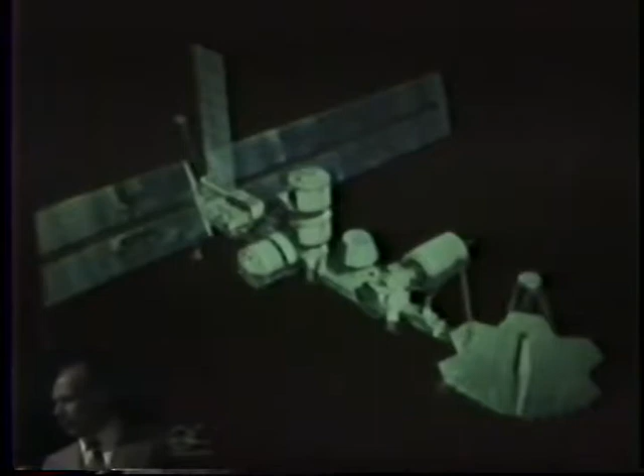So I won't have a lot of the fancy colorful slides that you have, but I hope we'll get this message across. Next view graph, please - this is an example of what we're talking about when we say space station in the early 1990s. This particular concept was developed under a study I ran for NASA a year ago, and represents not an early version but a more advanced version of the space station, which probably begins in the upper left half of that configuration. Later on, the third or fourth year, we would add major outside construction capabilities that you see in the lower right of the scene here.

The lower right at that location is showing the construction of a 20-meter telescope, which, of course, in low Earth orbit we have a much more fantastic, less occluded view of the stars and heavens than we do on Earth. That's the reason we want to take large telescopes into Earth orbit, but they can't be taken up in one piece. There you see a 72 mirror-face unit that is all assembled and hopefully designed and engineered to operate as one piece of glass, with little actuators under each one of those 72 one-meter mirrors.

A heck of a job to assemble, a rough job to calibrate, but that's the intent of NASA, to fly something like that in the late 1990s.

So with this, a goal of a station around the 1995 time period, let's take a look at really where we are and why we're there. Next slide, please.

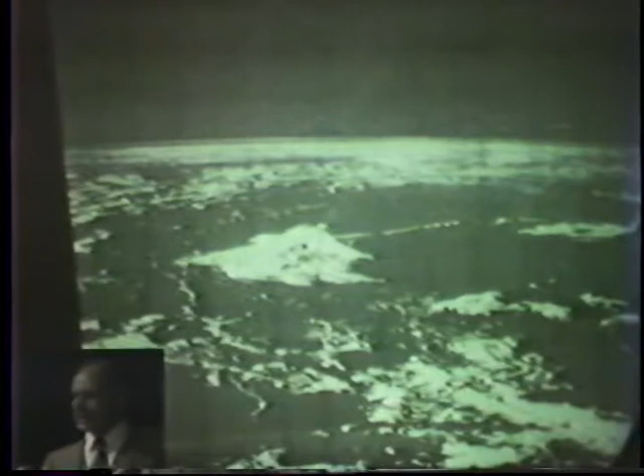Here you see a view from orbit of the Hawaiian Islands. It started off as a colored picture in a beautiful book. I'm sorry I don't have it represented by anything but black and white, but black and white sometimes gives you drama. There are those of us that enjoy black and white photography even more than color.

But that wasn't the reason. I'm sorry for this being such a poor quality image. This is a view you don't see too often from Hawaii. You usually see it on a map and stare at the islands and dream about your vacation. But it gives an indication of a broad expanse of ocean, which, whether you like to believe it or not, we really know very little about.

Oceanographic studies from orbit have been probably the least funded. An oceanographic satellite lasted about 90 days here about 4 or 5 years ago and unfortunately died in orbit. The oceanographers are looking forward to a tremendous increase in study in various frequency bands and various telescopic looks of the ocean, measurement of the currents and the temperatures and the thermals and the gradients and what have you.

The military is also very interested in it for a lot of obvious reasons, because a lot of the wars of the future and a lot of the threats and the defense will be from ocean surface vehicles and unfortunately under the ocean as well.

So this is the kind of view that we're looking to get, not just for a nice view to be seen out of a port or a window, but the same view to be covered by many instruments for science, for the military. We can't say that the military is behind the space station right now, but they have many reasons for those choices. With all of the activities the military has in space, a lot of us feel they eventually will certainly do technology testing on the space station, but that's a private opinion.

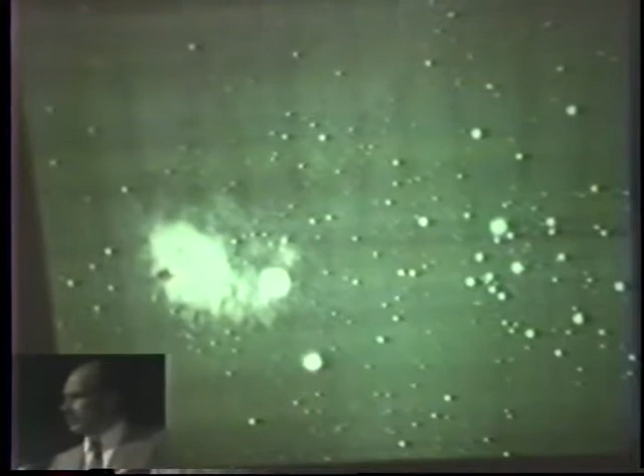Next slide, please. That same access goes looking the other way, not just down at the Hawaiians and the islands and the Earth, but toward the stars themselves.

Astronomy has the greatest political clout of any science in this country. More money is spent on astronomical science, more appreciation on the part of the public, and more money spent on university research at various astronomical institutions.

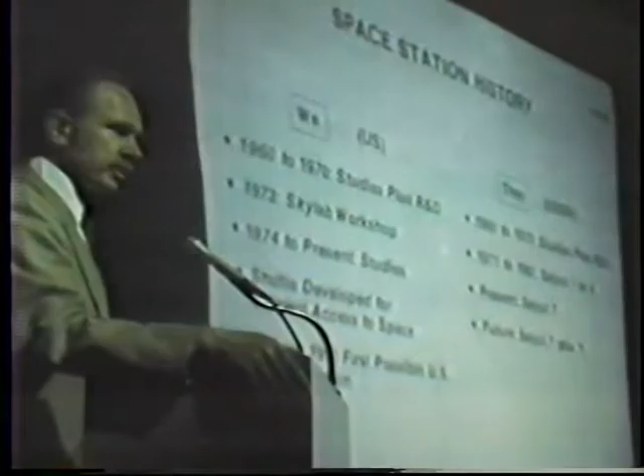What is the history of the space station? Early in the 1960s and through the 1970 period, there were a variety of studies on the part of NASA, and a little on the part of the military, to look at 4 to 6 man space stations. Our company happened to win the first space station mock-up contract, from the London Daily Mail newspaper. In the late 50s, they put out an RFP, and I think it was Boeing and ourselves who competed for that. We won a contract to build an elaborate mock-up, which was on display in the London offices of this newspaper, to show what was in prospect for man in the future. Since that time, our company has had an involvement with every major NASA space station study contract.

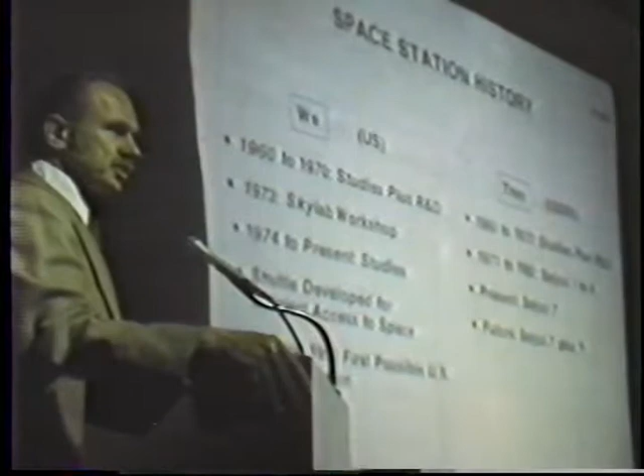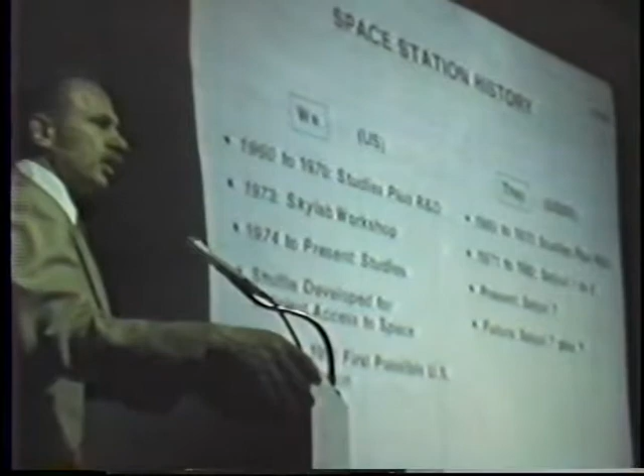We built Skylab, we built the Air Force MOL contract before it was cancelled. We advised the Spacelab consortium in Europe during the 70s, and Spacelab flew recently. So we've had a long and dedicated involvement in having man in space for long periods of time.

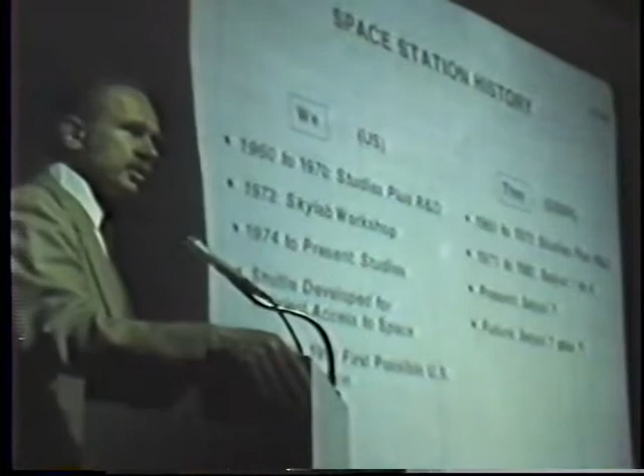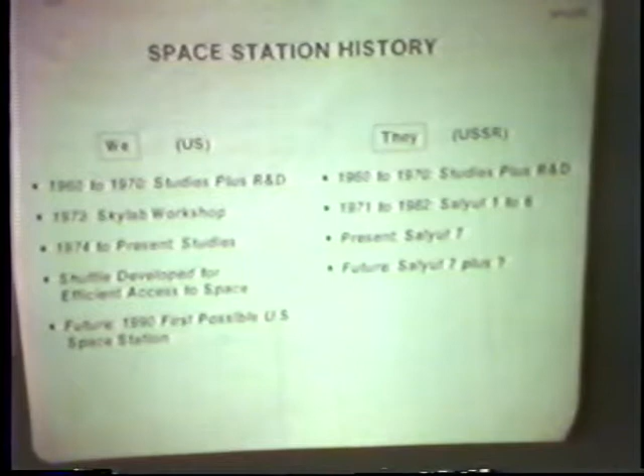Now the interloper in that was the access means. When NASA saw this tremendous potential in space, they concluded they could not get there with the Apollo configuration, which of course was this giant Saturn vehicle, all the parts of which fell in the ocean each launch. They had to have a reusable capability, so they developed the shuttle vehicle first. One of the main reasons for the shuttle was to act as a 90-day, 3-month shuttle vehicle to a space station, which hopefully would succeed it, and which is now the general plan.

In '73, Skylab flew, had 3 visits and up to 84-day residence, and eventually, as most of you know, came down because the sustenance was not incorporated, because we felt the shuttle vehicle was coming, which would open up a new era of modular space stations as opposed to one giant large vehicle.

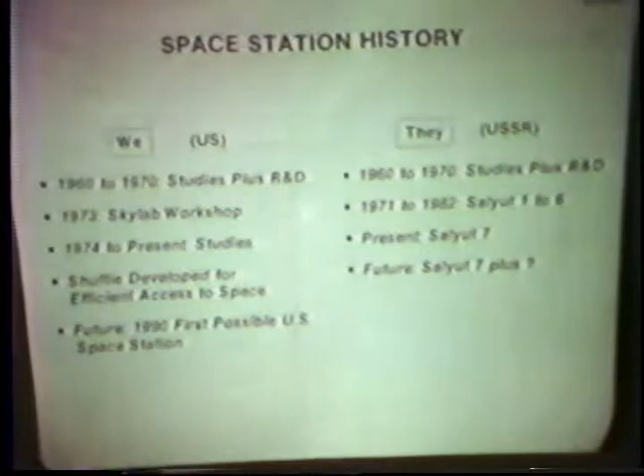Since that time, a flock of studies were accomplished, and here and there the space station was on the brink of development, but never materialized until in January the President cited it as the number 2 objective. I believe he had something like 5 or 6 objectives for this company and country in the State of the Union message. Now it remains only to be seen how much money will be put into it this year, next year, aimed at 1990. It's actually slipping a little bit now since this chart was made—1991 launch. Understand now 1991 is a good possibility we'll have a space station.

The Russians have been up there since '71, and they've recently been escalating their vehicle to grander dimensions, already have weapons on the vehicle for a number of years, and are doing very sophisticated and openly, avowedly military applications, and we are still studying the problem. So we're looking forward to that being a forcing function from a technological and image pride standpoint. But again, those thoughts are great, but when you're vying for funding within the Washington scene, a lot of other emotional issues come into the budget picture.

I won't repeat what the Russians have been doing—I think the chart stands for itself.

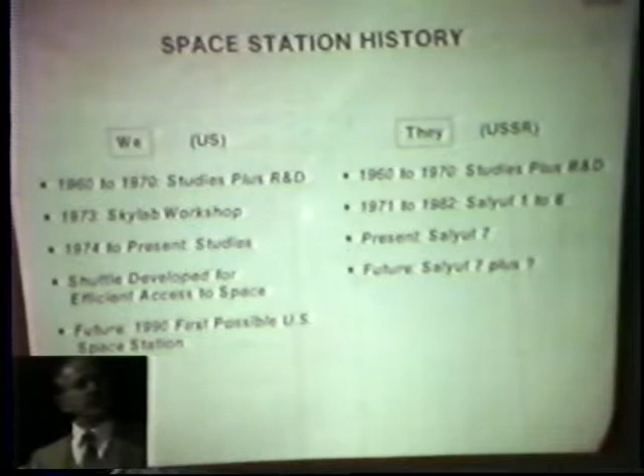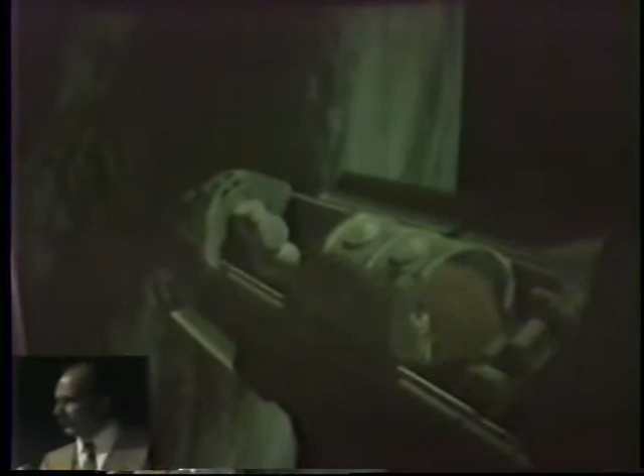Spacelab flew recently, very successfully, a great credit to an 11-member consortium of European countries involving everyone from Spain to Austria to Germany. Germany had the largest portion, I think the Italians were next, something like 50, 20%, then the French, British, and whatever. They all got together in what was imagined to be probably a Tower of Babel kind of operation that would fall apart because of lack of communication, but they did a great job. We helped them in certain areas as advisors and consultants. We won that contract separately as a company, but they built it and they literally did it all and deserve the credit. The European consortium put up about 1 billion accounting units, roughly equivalent to dollars.

The Europeans hoped that this country would buy more than the one module, which is now available for flight. They hoped there would probably be 3 or 4. That has not happened because the shuttle took considerable money, and a lot of money had to be put into payloads and what have you.

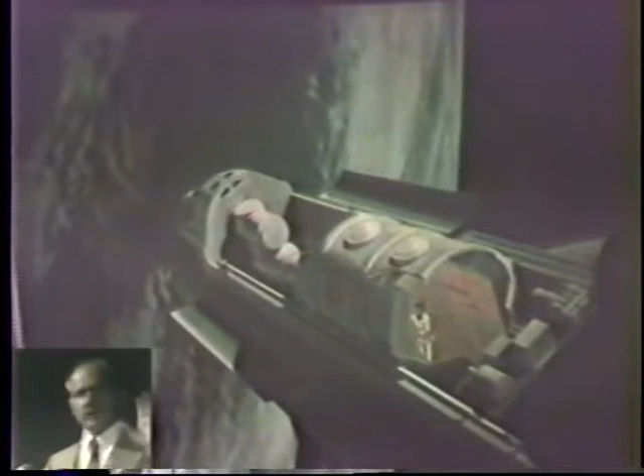But the Europeans are still interested in participation in the space station, and NASA is now grappling with how they might be involved. Conceivably, they could take a Spacelab, outfit it for longer flight than the 7 to 10 day shuttle flight, and plug it into a space station. Germans are already planning to fill a module with their own experiments alone for space station utilization, to show the enthusiasm that exists in the rest of the world.

To talk about competition, most of you probably know the Europeans have a consortium vehicle called Ariane, a serious competitor launch-vehicle-wise to our American shuttle and our company's Delta launch vehicle. So if you don't believe that competition enters into what goes on in space, look to the commercial world, which finds American companies flying commercial communication satellites on European vehicles. And the Japanese are not far behind—they have an N vehicle with major capability and prospect for geosynchronous operation, where most commercial communication satellites are. So we might be looking to the east and to the west for competitors now, in the launch vehicle business, let alone commercial services or scientific and technological experiments.

This then is Spacelab—just begun, a long and fruitful series with prospects ahead, but it only flies as long as the shuttle does. Therefore, we have this yearning to go many more weeks and months longer than that. Thus, we find the concept for a space station developing in our minds.

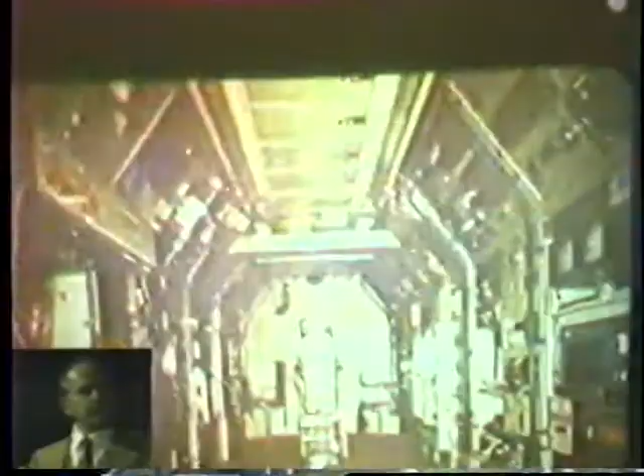This is the interior of Spacelab, probably a good image of what the interior of a space station module will look like. Remember the 15-foot diameter constraint of the cargo bay? Once you make that cylinder and want human passage and operation in between, you'll find your equipment on the outside, most likely, with a passageway and maybe even some experiments in the middle of the floor, as shown here. This probably will be found replicated in a space station scene maybe 5, 6, 7 years from now. So it's a good image—the Europeans could even fly something like this and plug it into the space station as a plug-in module.

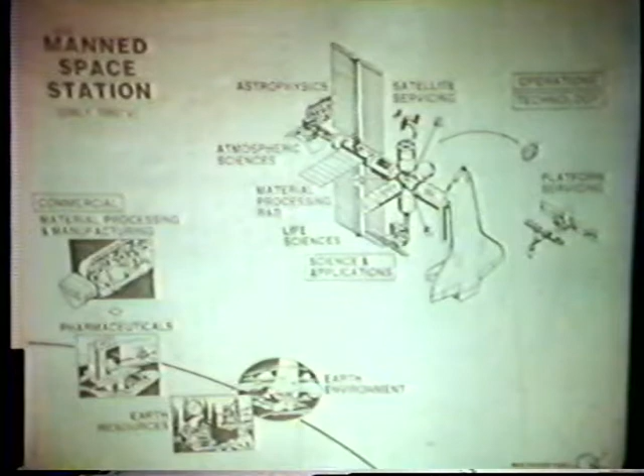So we see, in overview, that in the early 1990s we're looking forward to not just science or technology operations in a space station, but specific commercial utilization. Our company has a joint venture with Johnson & Johnson in the pharmaceutical world for continuous flow electrophoresis separation of cells for pharmaceuticals—very high demand, very expensive, very high cost to low weight items, ideal for a situation in a space station.

Space station provides a zero gravity environment which would apply to various exotic materials and what have you, but pharmaceuticals and lightweight items with high cost are the things that really pay off in a space station. I think you'll find that pharmaceutical production is in prospect for a space station.

We've already separated live cells and some simulated cultures in earlier shuttle launches that you may have read about in the paper. So that prospect is there.

Obviously, looking down at the Earth, its resources, and the Earth environment from that view is a great application of the space station, not the least of which is the ocean one that I mentioned, which feels like sort of a forgotten science from a space standpoint.

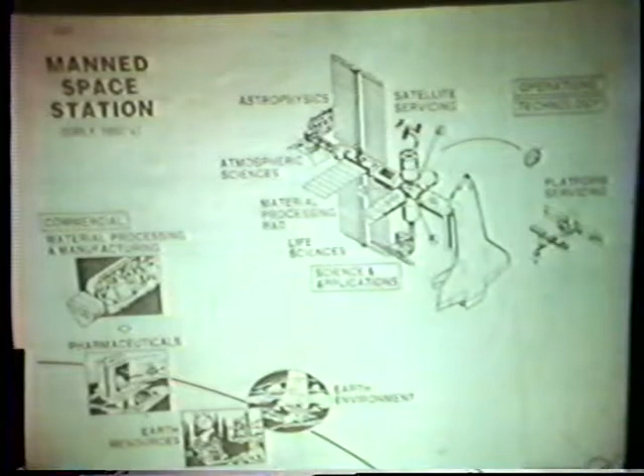Let's escalate in time to the late 1990s. Here we find several significant additions. The vehicle takes on a literal space base operational mode where we can launch vehicles to geosynchronous orbit, 20,000 miles in space, understanding the space station is down at several hundred miles altitude. Instead of launching everything up on the shuttle and out of the shuttle, we will use launch vehicles that are based on the space station.

We will only bring propellants up from the ground now, and we'll be able to use that as a launch base to deliver and service things that are in geosynchronous orbit. Also in that time period, we'll probably incorporate the flight of a unit called the platform, over there on the far right of the screen.

The platform is for those payloads that can't stand the shake and the rattle or the effluence of a manned vehicle. That could be certain instruments, infrared instruments, certain visible region instruments that want very quiet conditions. They work at 1 arc-second pointing accuracy, and obviously they can't stand the impact of a man floating across who bumps into a wall, or someone who coughs, or equipment that moves and shakes the vehicle.

So they will want to be off on a co-orbiter vehicle, and that is called a space platform, specifically for those reasons of service and separate operations, yet serviced from the space station by little scooters that go over and replace propellants or exchange experiments and that type of thing. Again, a close-in operation using the space station as a base of orbital operations, as opposed to bringing everything up from the ground with the shuttle.

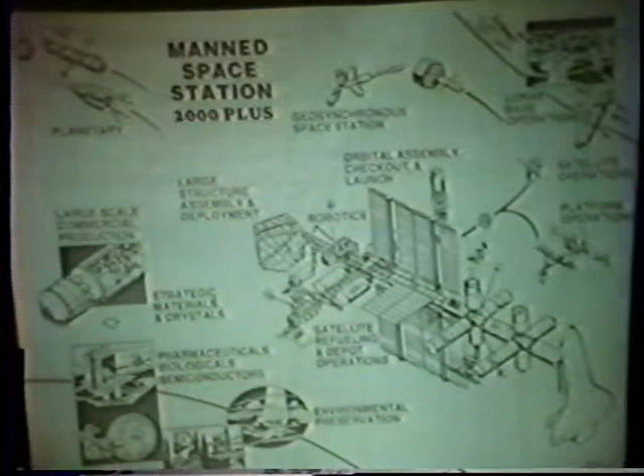A satellite that goes around the Earth, and the Earth has so many complex operations that require a military advantage of some off-site base or surveillance advantage, is just too lucrative a spot from a military standpoint alone to stay unused for very much longer. And the space station would be an advantage there.

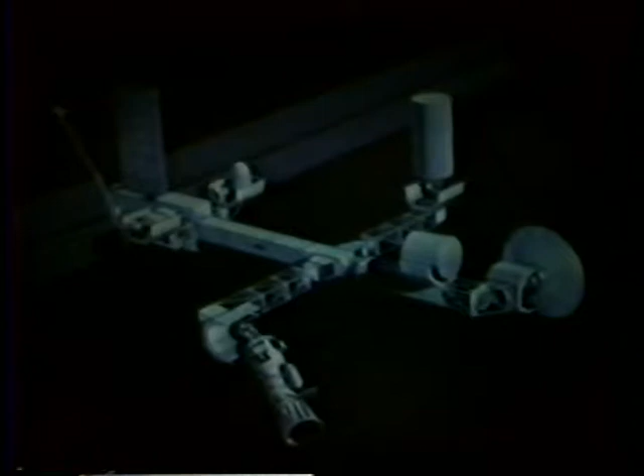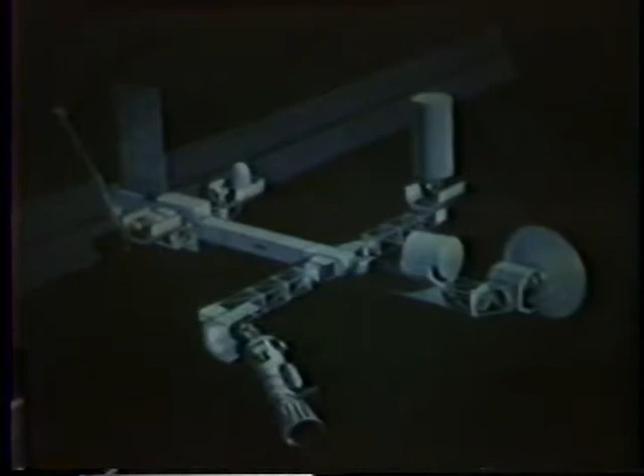This is a picture of the space platform, the vehicle that flies unmanned but is shepherded by the space station, flying maybe 20 to 30 miles away from the space station. Flight mechanics and physics principles being what they are, whenever you're in a different orbit, you begin to fall behind, move ahead, or fall below your companion vehicle. But it's a repeated process because you're basically playing with the basic laws of nature.

So there's a scheme whereby we would have this vehicle slowly change its position around the vehicle in an ellipse. When we complete half the ellipse, we would use propulsion to elevate it to its original position, and then we would track around in that semi-ellipse flight mode again, probably taking several days to go through that excursion before being escalated up to its original position.

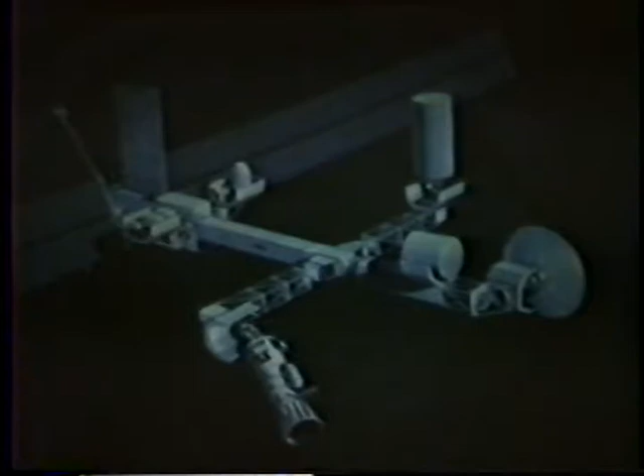So look forward to the space station not being alone, but having an off-site facility for those payloads that do not want to be on the space station, but serviced by it.

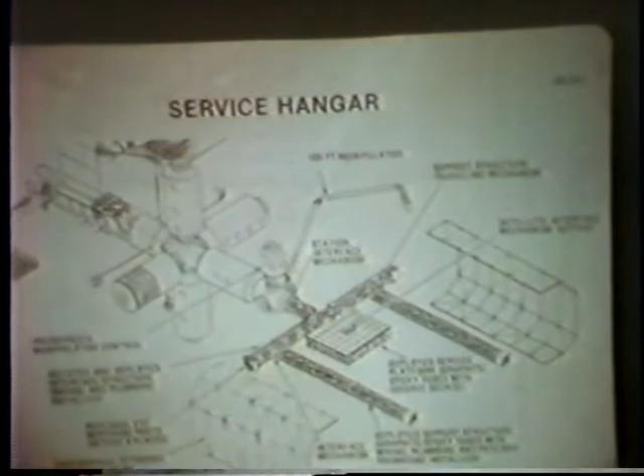I believe we have two on top of that. Are there two separated? No, I'm sorry. Are there two stuck together there? Yeah, I believe so. Thank you. The other one first, please.

Everything that is on the space station comes up by the shuttle. The shuttle will then have to be—and here's where architecture comes in—as you look at an industrial facility or a high-tech facility with frequent services coming into one point, you have to make sure that the entrance corridor, the operating envelope, and the service flow, the traffic flow of operations during that logistics visit, are efficient.

Generally, the visit of a vehicle like this is a major perturbation to the operation. Certain scientists will be brought up new, others will go home, and their equipment will go home. There's equipment that comes from the inside and is brought through tunnels into the shuttle.

There's other equipment that is taken out with that large crane, out of the exterior cargo bay, and loaded onto the space station. Sometimes we have to take off payloads on the space station, put them on a parking spot, take the unit out of the cargo bay, put it in the original position of the other one, and then take that other one and put it into the cargo bay of the shuttle.

So we have this grand game of manipulation that goes on outside, while inside, in what we call an IVA mode—intravehicular activity mode—the astronauts push these little units that are being replaced by others as the scientists, technologists, or commercial people exchange payloads. So you can see the shuttle comes up.

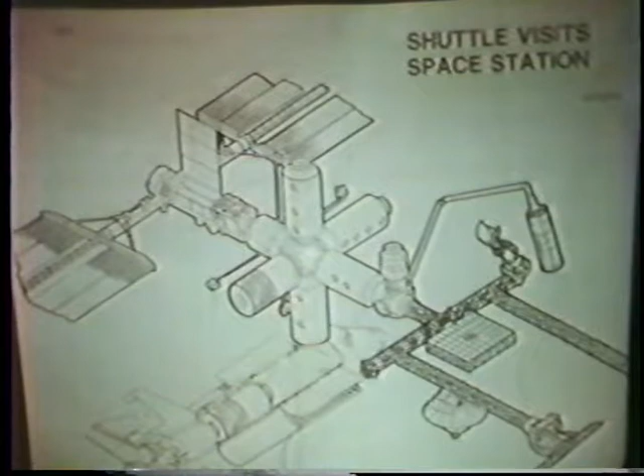Over on the lower right, you see the major outside operations facility. This is where things will be docked, assembled, repaired. We came to a conclusion early in the space station design business on this go-around that the outside operations, like many high-tech test facilities, are a major dominator on the scene. We don't want that facility anywhere but out in, quote, the backyard. We don't want it in the middle of things.

We need a lot of reach room, we have to put utilities way out there, and we have some hazardous units. The one that's on the end of a crane is about 7,000 kilograms of liquid hydrogen in that particular experiment. There are major hazards associated with it, as those of you who've worked on major facilities using cryogens here on Earth understand. In space, we don't always have those large cement block walls we can put around them, so we need unique operations and design features incorporated into that.

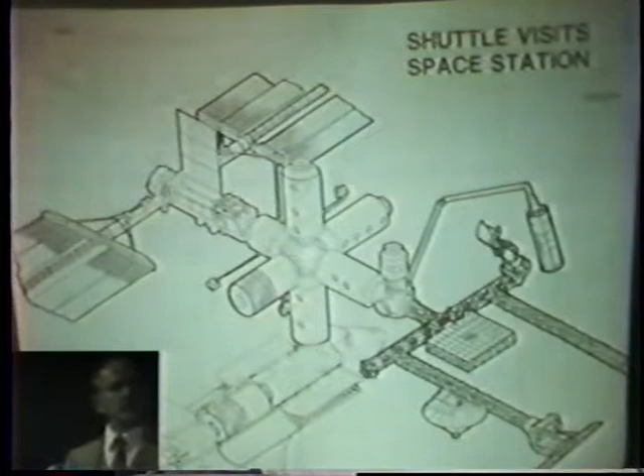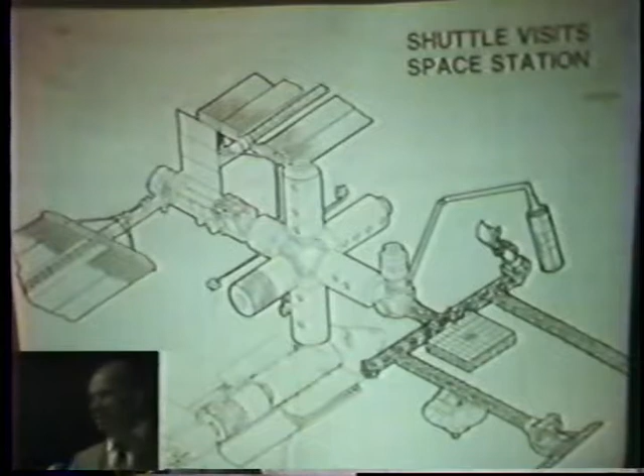We also need a major control center for all of the operations, and you see that mini blockhouse at the base of the crane that literally is a control center for everything that goes on in the aft section of the exterior of the space station. Meanwhile, in the other modules, things go on as usual on an interior basis, literally irrespective of what's going on outside.

Then we escalate our thoughts into major repairs and servicing of vehicles. We get into a hangar concept. We have to enclose some of these vehicles that we bring onto the space station and service. Some of them need major repairs, some need major payloads exchanged on them, and we have to protect them from the sun.

Sometimes we have to actually pressurize the area. So those of you that have been involved in large structures and hangar design understand what a challenge it would be to bring a major structure like this up, all folded up in the shuttle. I might mention I saw the truss work here outside.

A major new thrust in our business is the development of efficient concepts for deployable trusses. I would say that anyone with good ideas in this area would certainly find it interesting to track what is happening in our business and could possibly even contribute to it.

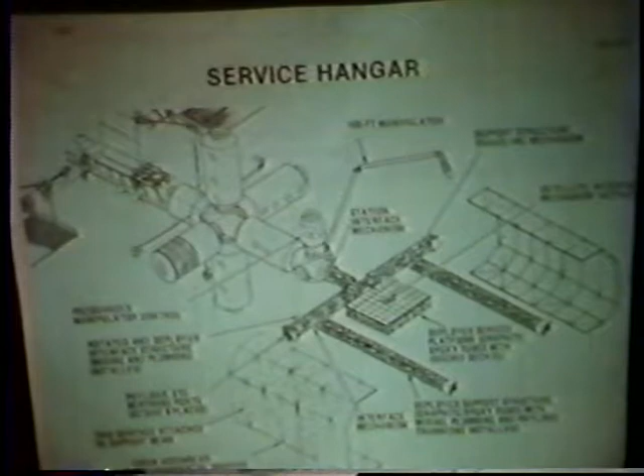When you pack trusses into a high-density pack so that you can have a major deployment and expansive kind of set of structures that you see here, space frames, I believe they call them in your business, that is a whole new technology for us.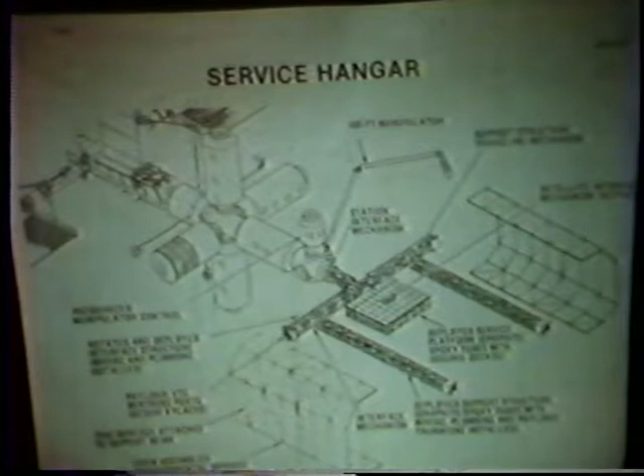The big hooker in it is when you have lots of joints and you're trying to deploy it, you don't have a lot of capability to get out there and unfreeze a joint that may be hung up. And when you have hundreds of joints, you've got to make sure that the deployability is in fact there and that the reliability is there. So everything that glitters isn't gold in easily appearing deployable structures.

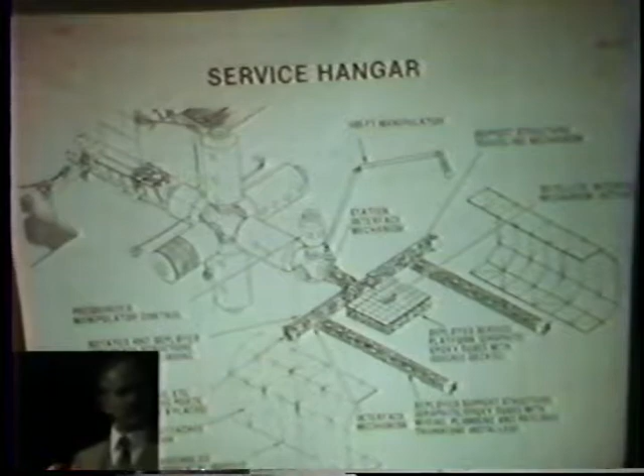I mentioned astronomy before. This is a view of what it might look like during the construction of this 20-meter telescope. The 20-meter telescope will follow the current series of infrared telescopes and the space telescope that Lockheed is building, for example. Lockheed is building a telescope that is the size of the cargo bay of the shuttle, about 3 meters in diameter with its surrounding enclosure.

The next step is this 20-meter set of optics that'll be taken up. Each one of the individual mirrors, which are the hexagon shapes, they're being studied right now by Eastman Kodak and by Perkin-Elmer and the Itek Corporation, the major optical companies in this country. And people like ourselves are studying the substructure.

So there you see a unique blend of people that are optics-oriented, people that are structures-oriented, and our mechanical designers are having a field day designing these various deployable trusses. And our EVA specialists are, of course, trying to integrate the entire operation.

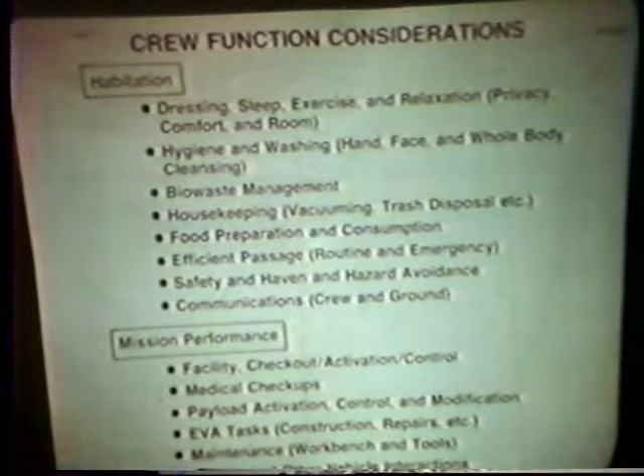And the old ones go down. Next slide.

The habitation for each one of these crew people, of course, understand now, male and female, integrated facilities now, not so on Skylab. The personal hygiene functions, the waste management, 150 pounds for each crewman for 90 days, no small problem.

Trash management, huge problem. On Skylab, we were fortunate, Skylab was built out of an upper stage of Apollo. It had a huge liquid oxygen tank, did not have oxygen in it, but we used it for a trash bin, 22 feet in diameter and about 10 feet deep.

Very convenient. We're not going to have that on a space station, but we're already noticing on Spacelab that we generate a tremendous amount of trash with the food, the cartons, the paper that's involved, the throwaway clothing, reusable clothing, that type of thing.

And getting all the way down to the bottom element, the most personal element, we feel a full compartment concept, not the crowded concepts that you sometimes see for a space station. If they're going to live up there for long periods of time, the crew compartments should be fairly elaborate so that we don't end up with psychological problems on the part of these high-tech personnel that we have involved.

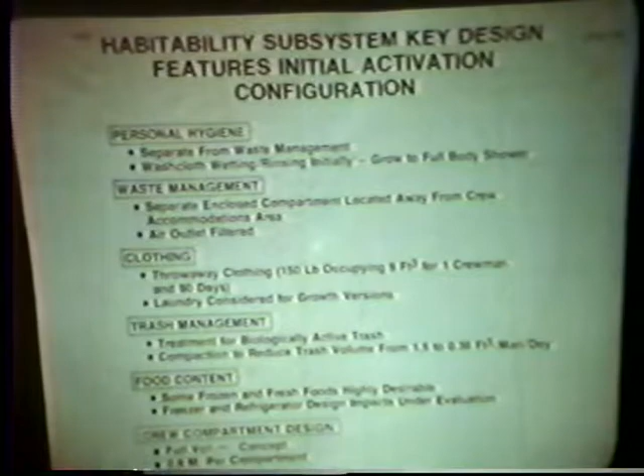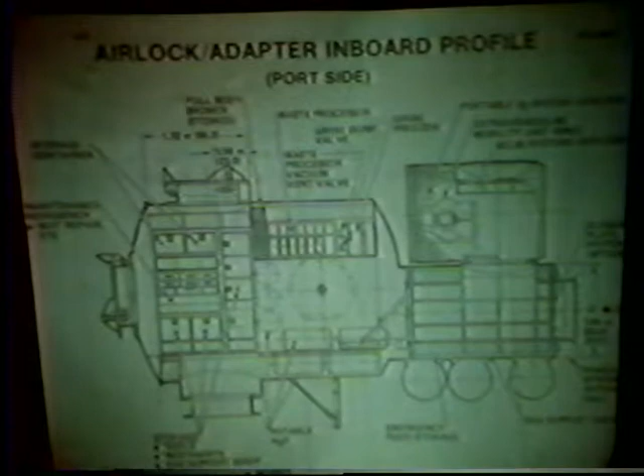Here you have a central docking adapter unit where we have essentially a bathroom. We have various ports on which to mount modules on the upper, lower, and straight out the back, and also into the screen attached to the front.

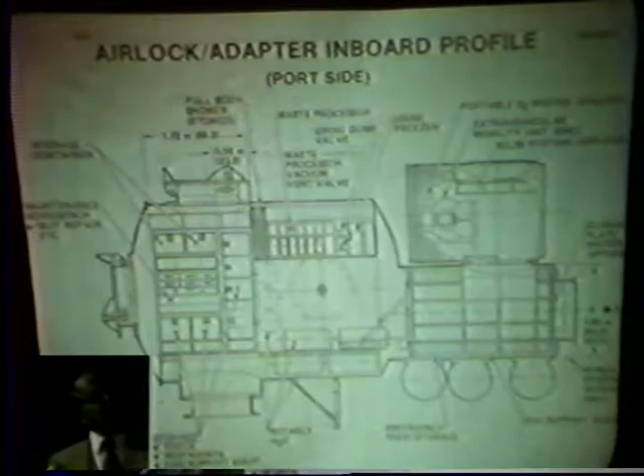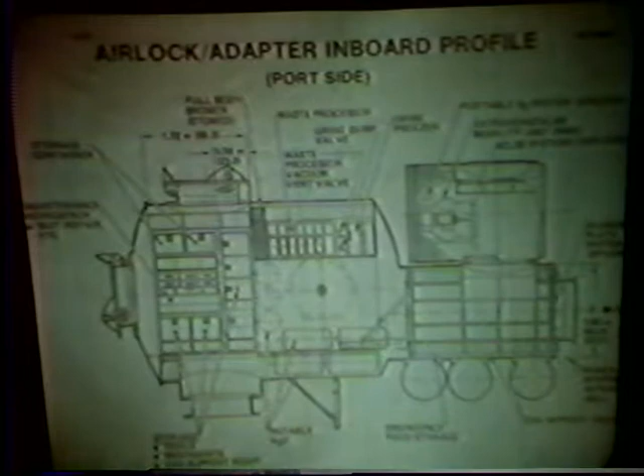Here is also where we have our escape hatch, our EVA airlock over there on your right. That's an airlock that permits EVA crewmen, there have to be two at all times, one monitoring and one performing EVA functions outside the vehicle. Inside the vehicle you have a workbench and maintenance bench and suit repair facility.

This unit is heavily shielded and would constitute a safe haven in case of trouble on the vehicle. That's a central facility that most every space station has got to have.

Underneath the floor, we'll probably have our trash compactors and various pumps, pipes, and filters for the environmental control system, and that will also be true on the space station of almost anyone's design. Next slide.

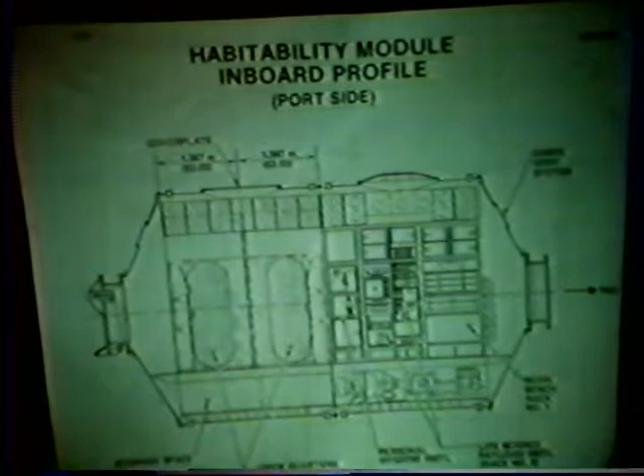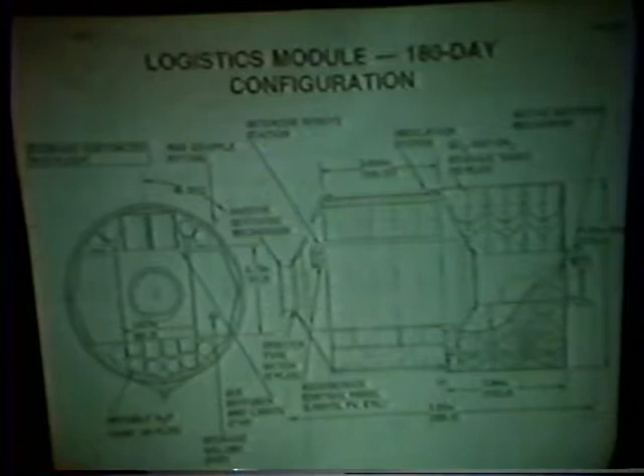Now we come to Brand X. The boys across the water in the USSR have been flying one half of this vehicle since 1971, and last year increased the size of the vehicle, almost doubling it, and added a multiple docking adapter in the center for even larger growth. They have major plans, a giant vehicle roughly the size of our Saturn vehicle, which we no longer have. A model of it is sitting in a launch area and has already been detected by our military intelligence. They plan big things in space.

It's all built on a very simple modular approach, the way the Russians have always done. Very little exotic design, just straightforward, plain utilization of space, not too many design awards. The people sleep in there like the older submariners did, literally over the torpedoes or crowded around the equipment. Not too many human factors awards, but they get the job done. And they've been using the same vehicle for years.

Once they come up with a design, much like they do with launch vehicles, they keep building that same one over and over and utilize it. They put their money into what they do with it, not the carrier vehicle.

The analogy I like to draw is the DC-3, and not just because I work for that company. The DC-3 was used all the way up through Vietnam as a gunship. It was developed in the 30s. It carried guns, these high-intensity Gatling-type guns that were very effective. It didn't matter that the airplane didn't look like a modern design. It's the function, the payload, that was important. They used DC-3s, and up until a couple of decades ago, they used the Ford Trimotor down in the Brazilian jungles. Very effective. They got the job done.

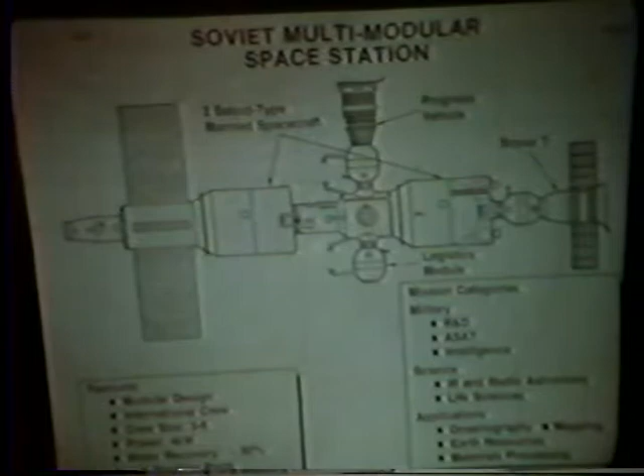So we have a few things to think about as we look at where we are, where we're going, where Brand X has been and where they're going. We are the greatest in manned space flight. The things we've done, going back from the shuttle through Skylab, through Apollo, were spectacular.

The Russians are now starting to build a small shuttle. The Russians never had a Skylab. The Russians never had an Apollo. They do have their own vehicle that's been up since 1971, a relatively small vehicle. They're avowedly military—they make no bones about the fact they do a lot of military work. They also do a lot of good civilian Earth resources kind of work.

Many exciting, rewarding, commercially profitable things are in prospect on the space station, and they need the long-term presence of the most capable machine that we know of—and that's men and women. The human being performs functions that in a lot of cases we have not yet been able to automate, plus the fact that he or she can think on the spot faster than many computers can really develop a capability for.

The Russians have been up there now some 13 years. Hopefully we'll have a space station by the early 1990s.

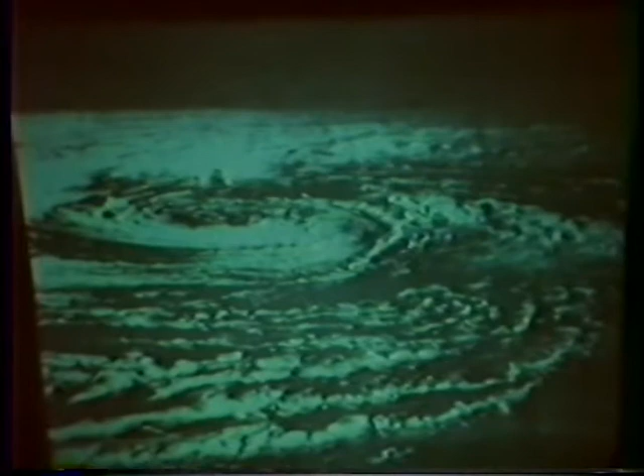Next slide, please. So we find ourselves, in closing, taking the perspective of being in orbit, imagining commercial activities producing pharmaceuticals, producing exotic metals, producing chip materials. We have an electronics explosion—gallium arsenide chips of very high purity, which means very high performance computers can be better made in zero gravity than here on the ground.

So industrial use, major scientific increases in capability, major technological advancements made in orbit that can be used on the ground, major use of a space station as a space base for other things in orbit so the shuttle doesn't have to keep coming down to perform those functions. Those are what are in prospect for the space station.

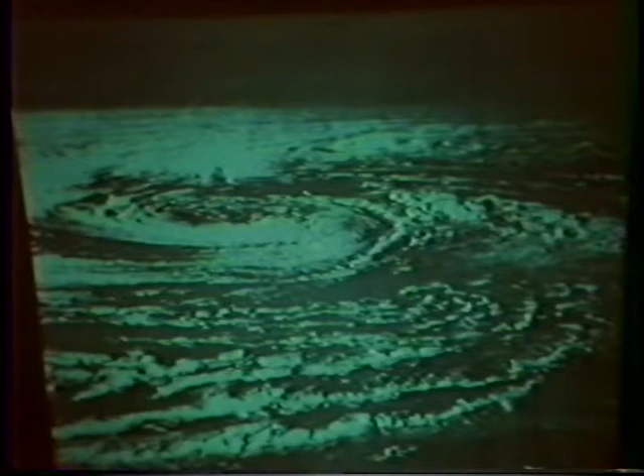If I could have the last overlay. It's all because we now have what? We have unique access to an entirely new horizon, or an area beyond a new horizon, because we have the shuttle. And if we don't use the shuttle for anything more than just a shuttle for short-term operations, we're doing something akin to, possibly in the history of this country, running back and forth to California from the East Coast and never staying and really doing very much, and discovering this great state that we're a part of.

Thank you very much.

Are there any questions that I can try to answer? Yes, sir. Could you briefly run down some of the environmental differences between living on Earth and living in a space station, conceptually, routine, daily?

In space, in zero gravity, you forget about your feet, number one. You're very conscious of your head and your upper torso. On Skylab there was such an intense focus on that—and maybe a little lower—but the feet essentially tore stuff off, tore cables loose, bumped into things and much more. That's number one. That's very personal.